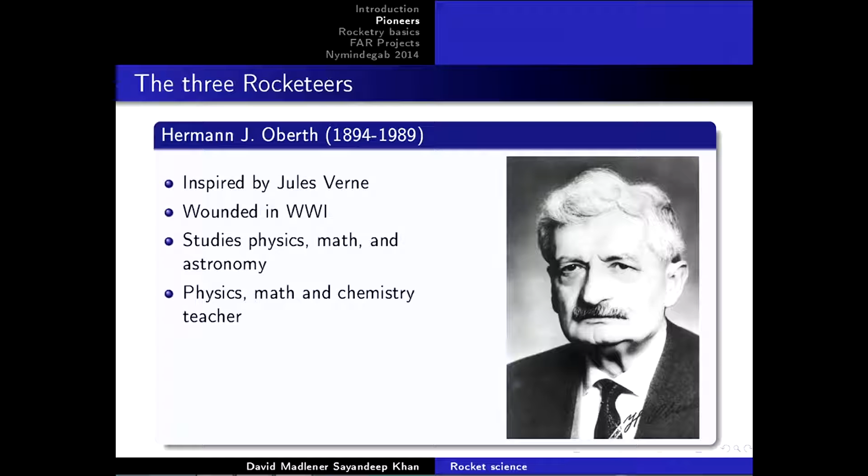And he became a physics, math, and chemistry teacher at a gymnasium, but he was very restless and started to think about rockets. His ideas, put forward in the early 1920s, were violently opposed by so-called scientists who said what he was thinking about was totally utopian and not possible, and that he was a total loon.

Anyway, he developed the first German liquid rocket engine. Just a few years later, in 1930, it had its first test, together with his pupil Wernher von Braun, who some of you may know. And, interestingly enough, he was also a philosopher and parapsychologist.

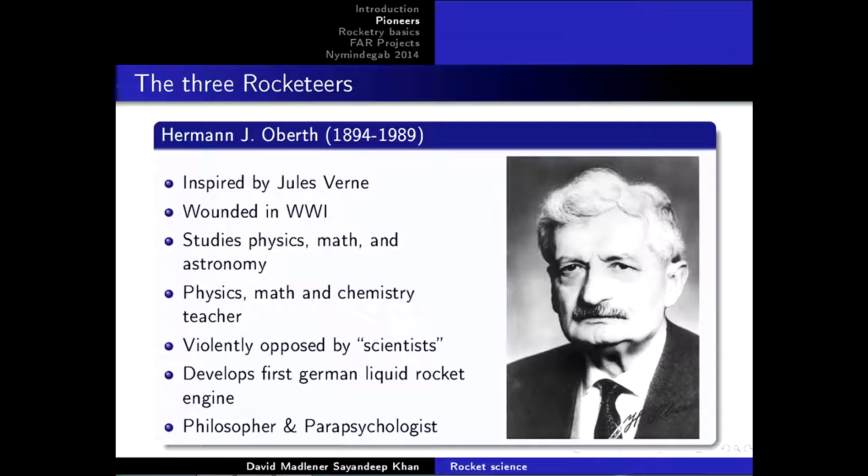So now a few important points in the lives of these three rocketeers that we know of. And one that we know very precisely, because he kept a very nice diary, is Goddard's epiphany, sitting in a cherry tree on the 19th of October, 1899.

He had just read H.G. Wells' War of the Worlds and had some chores to do outside, and instead of doing the chores, he climbed a cherry tree, where he thought about it, and he said that it was one of the quiet, colorful afternoons of sheer beauty which we have in October in New England, and as I looked toward the fields at the east...

...I imagined how wonderful it would be to make some device which had even the possibility of ascending to Mars, and how it would look on a small scale if sent up from the meadow at my feet. I was a different boy when I descended the tree from when I ascended, for existence at last seemed very purposive. So here we have a clear case where a single moment in life changes everything for this man.

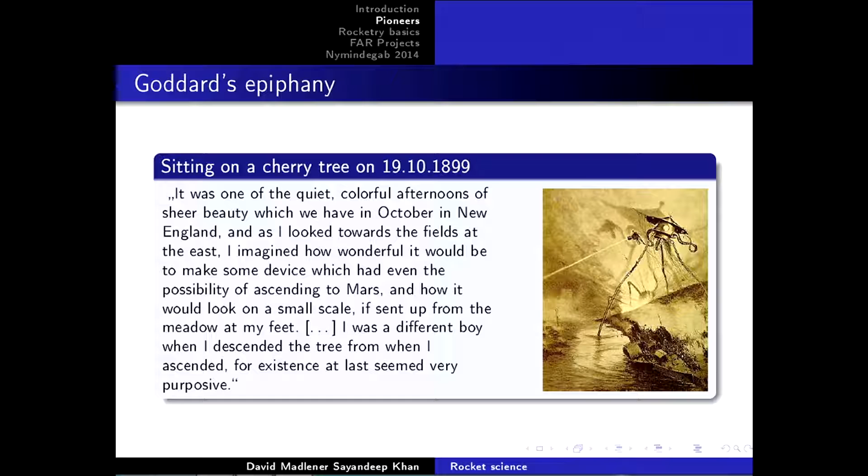Then another very important point, this time for Mr. Tsiolkovsky, was his first publication, called The Exploration of Cosmic Space by Means of Reactive Devices, also known as rockets.

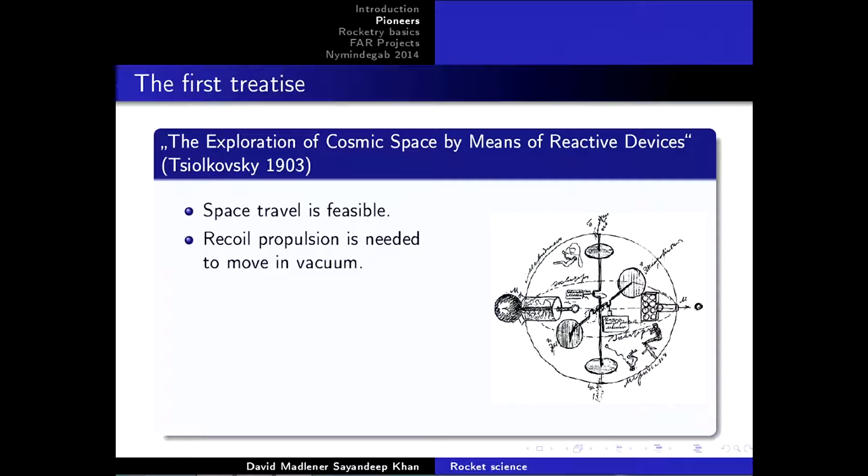So he said in this book that space travel is feasible, which was totally preposterous at that time. Recoil propulsion is needed to move in vacuum, so he had it figured out. Gunpowder is not energetic enough for propulsion, and remember that since the 12th century, every single rocket that I know of had been built with gunpowder. But he said there are liquids sufficiently energetic, so there is a loophole.

Even if gunpowder is not good enough, there are other liquids that can do it, and he named them. For example, liquid oxygen and liquid hydrogen would be an ideal propellant combination. This is very interesting because liquid hydrogen had been synthesized only a few years before in small quantities, and he was thinking about burning it in tons and tons of stuff, where 1 kilo would cost like 1 million euros. So he was way, way ahead of his time.

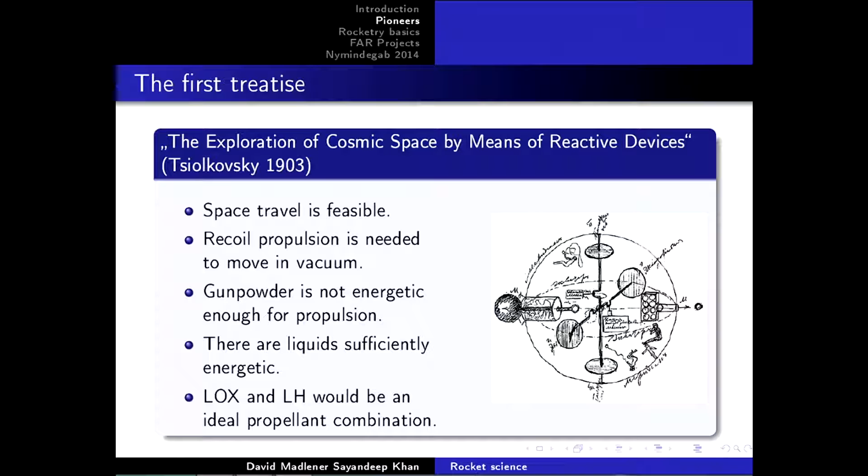As is the case with such pioneers, nobody understood what he had written in this treatise. Well, anyway, 20 years passed, and Mr. Oberth published a book. First, he tried to write a dissertation in Göttingen, where he was studying astrophysics, astronomy it was called in that day, and he called it Rocket to Planetary Spaces, die Rakete zu den Planetenräumen. His professor, Mr. Max Wolf, said it seems all quite well, but it has nothing to do with astronomy, so no, I cannot pass this dissertation. So he went on and published it as a book, and later on got a diploma thesis for this book.

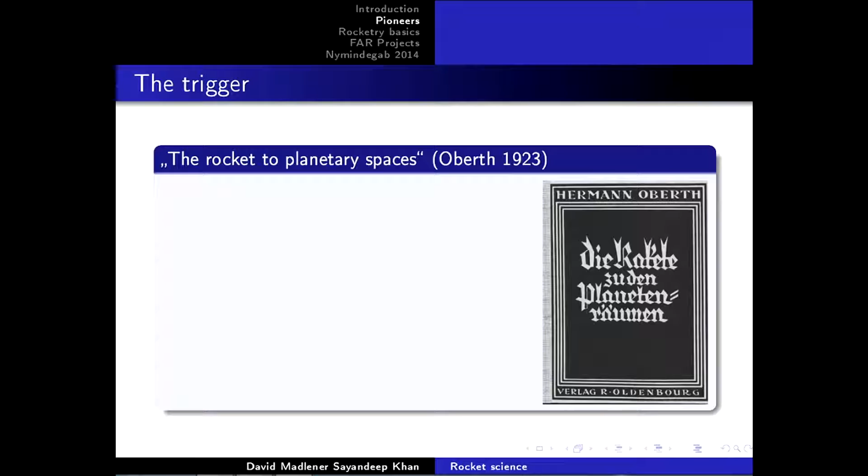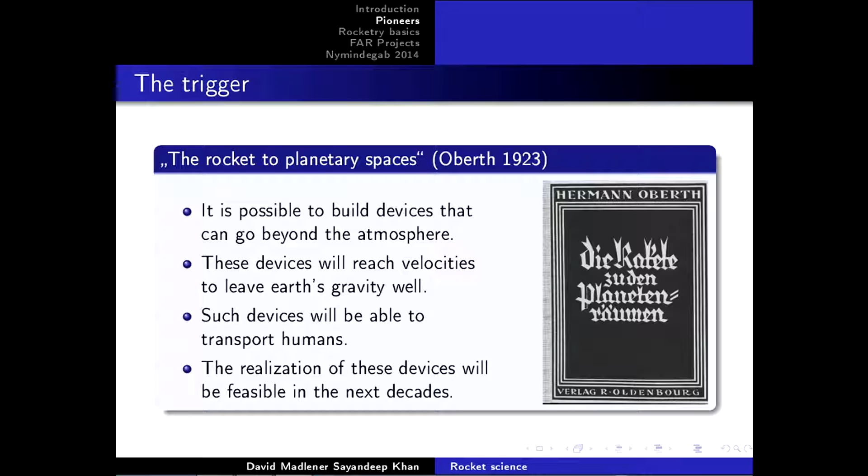This book was read throughout Germany and spread to other parts of the world, and in the end made these three rocketeers know each other. So what did he write in this book? It is possible to build a device that can go beyond the atmosphere, very similar to what Tsiolkovsky found 20 years earlier. These devices will reach velocities to leave Earth's gravity well - preposterous. And such devices will be able to transport humans - impossible. And this was the really important prophecy: the realization of these devices will be feasible in the next decades. This is quite well, knowing that we landed on the moon like 46 years later.

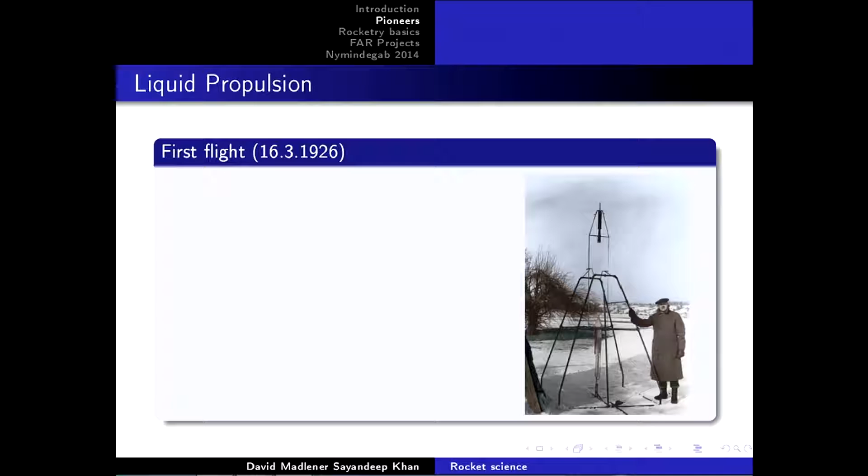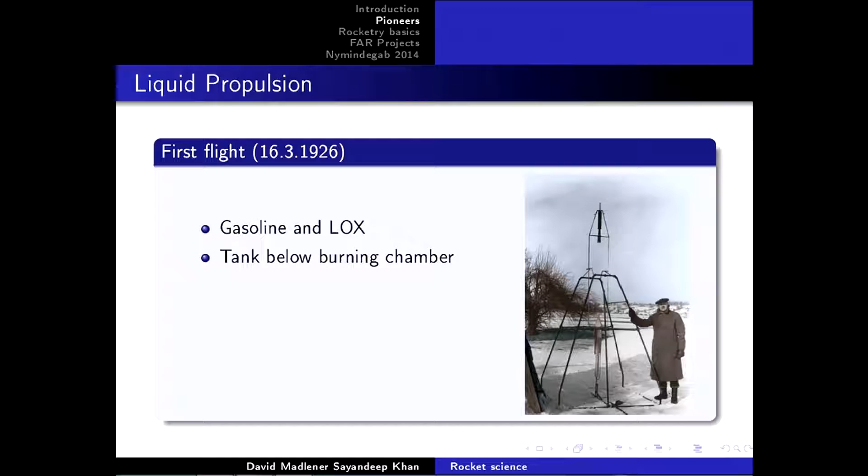Another very important point was Goddard's invention of liquid propulsion. The first flight was on 16th of March 1926. He used gasoline and liquid oxygen. The tank was below the burning chamber, totally atypical of today's design - the burning chamber is this little black thing up there. And then we have the Laval nozzle here, which was totally new, which wasn't used before.

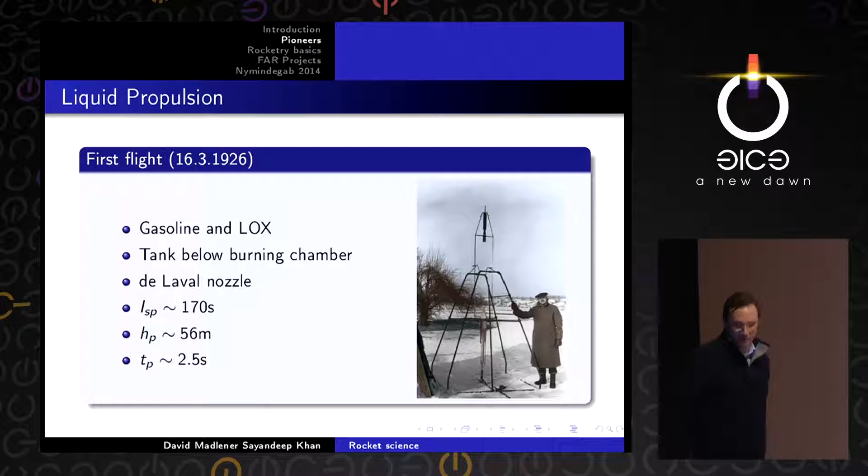It pays off to be a physics professor sometimes. It has a specific impulse of about 170, almost double that of gunpowder - not very good compared to modern engines. But anyway, he only reached 56 meters, and it lasted 2.5 seconds to reach this height. Unfortunately, there was a camera running, but before the rocket could lift off, the film was empty. So no movie - you know that moment, right? You really get something right, and then, no, sorry, but you didn't press the button. That happened to Mr. Goddard too.

Okay, let's talk about foundations. What do we need to make rocketry, to be a rocket scientist? Of course, mathematics - and mathematics is everywhere. Linear equations, algebraic equations, differential equations, calculus, integration, everything else, and some specialized things too. So mathematics is very basic. Then, of course, physics. Although we don't need very sophisticated physics, just classical mechanics, classical gravitational theory. If you get close to planets and moons, maybe you need some extension of the normal point-like theory, but this is not really complicated.

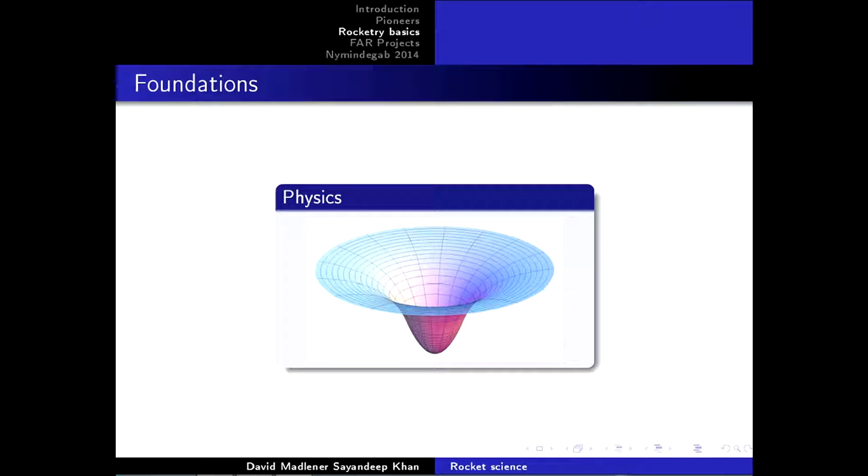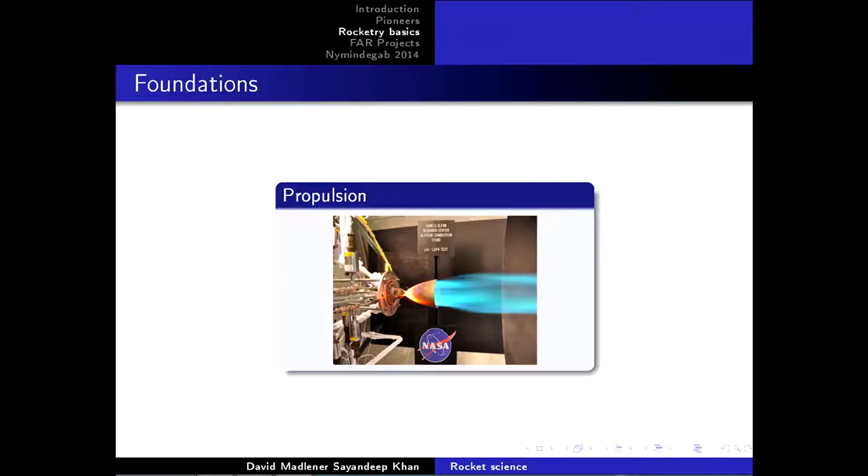Then, and this is for the pyromaniacs here, we need thermodynamics, because this is a theory of combustion. Combustion is today very important, especially for high-thrust engines. This is almost, I mean, everybody knows this: we have the burning chamber here, where the combustion takes place, and then this bell-shaped nozzle that expands the gas, transforming the inner energy into kinetic energy of the gas, thereby propelling the rocket in the other direction. Then, of course, aerodynamics, at least as long as you stay within the atmosphere - this is very important because it's the main force on the rocket.

If you have seen rocket launches, there's always this point of max Q. Max Q means the rocket is at the point where the most force is acting on it. It's very dangerous at that point, and after that, it gets down. So aerodynamics - very important, very complicated too. Orbital mechanics - once you reach space, you will have to understand very, very well where you are and where you're going. So orbital mechanics and maneuvering, otherwise you won't reach the target you intend.

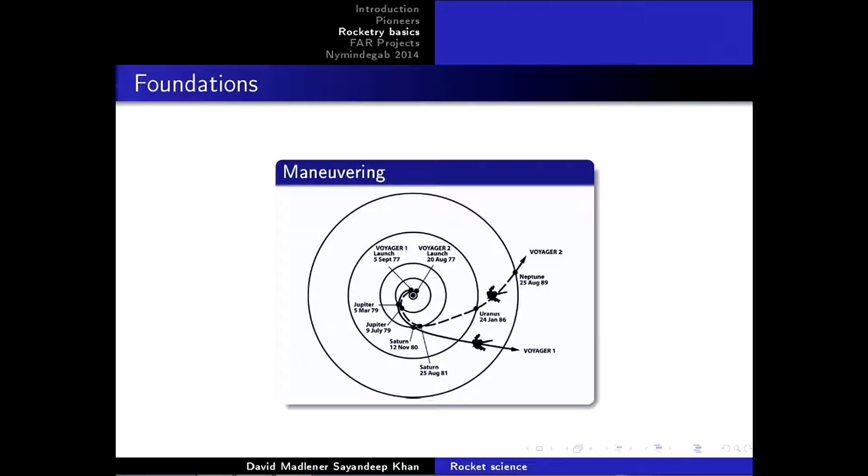This is, for example, the trajectories of Voyager 1 and 2, which was really pure luck to get so many planets in one shot. You have to launch it at the right time, otherwise it's not possible. Then you need a lot of mechanical engineering.

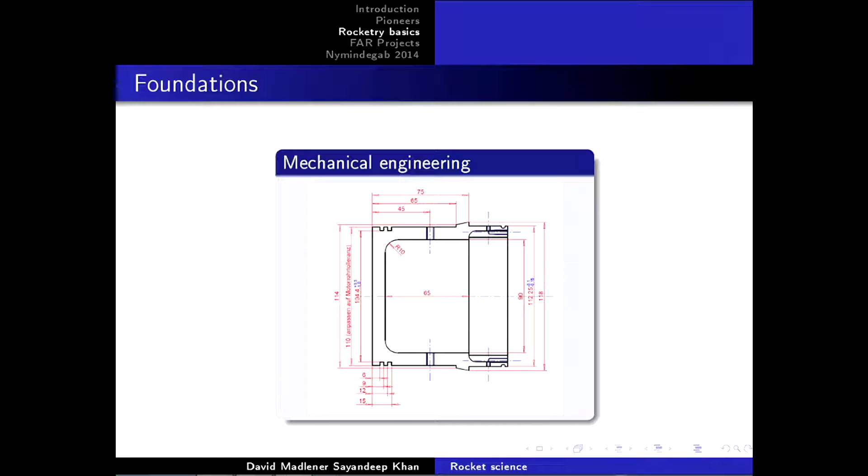This is today much easier than it was 40 years ago. We have CAD-CAM, CNC milling machines and lathes and everything. Much easier to reproduce, especially because our materials today are more reliable—if they say it's aluminum, it's aluminum, not just some crap. So we need a lot of metal working, milling, drilling, whatever.

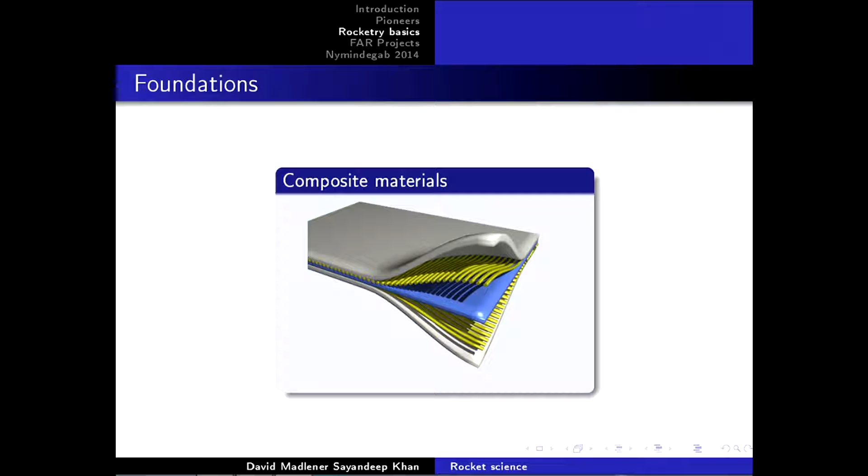And this is coming now more into focus. You will use composite materials if you need a lightweight structure that is sturdy enough. It's more complicated than cutting metal, but it's really lightweight. It pays off. Then, of course, electronics.

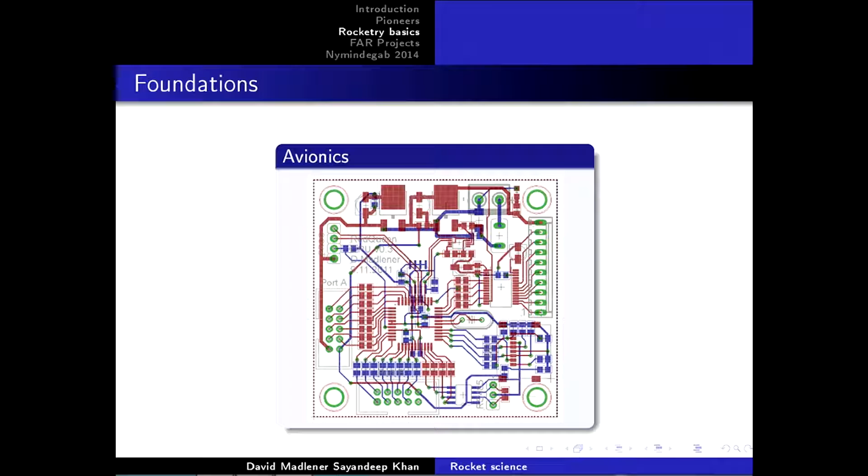Everything that will fly on a rocket will have to be very light and consume not too much energy. Otherwise the batteries will be too big. This is prohibitive. I mean, we are not in the Apollo era anymore—we don't need hundreds or thousands of watts to run a computer.

And this I don't have to tell you, we need a lot of software today. In the beginning, the first rockets were launched without digital computers. They were launched with analog computers, the so-called Mischgerät was the first of them, and there was not one single line of code. Remember that—they flew the first rockets with that until the Apollo program. The Apollo program was the first one that really used digital technology.

And very important, once the rocket is gone—and normally they are gone very, very fast—the only way to get your data is through telemetry. No other way around. Okay, now let's see how rocketry works.

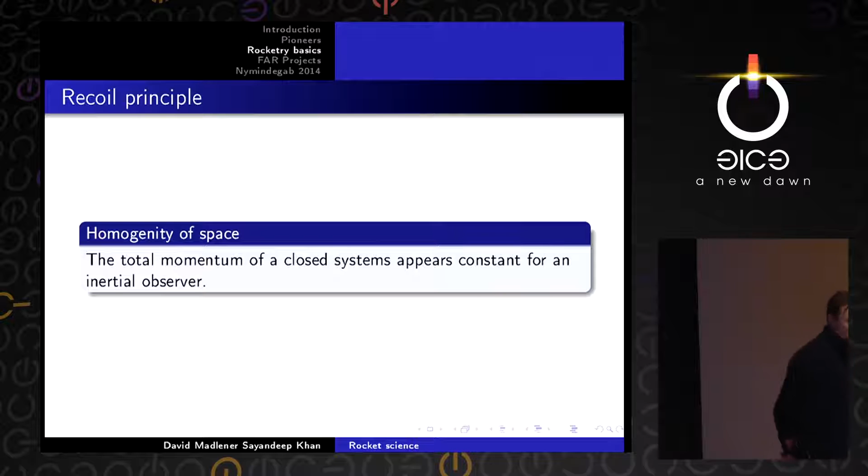The principle of every rocket is the so-called recoil principle. This states, as a direct result of the homogeneity of space via Noether's theorem, that the total momentum of a closed system appears constant for an inertial observer. Or with Newton: if there are no forces, the total momentum doesn't change.

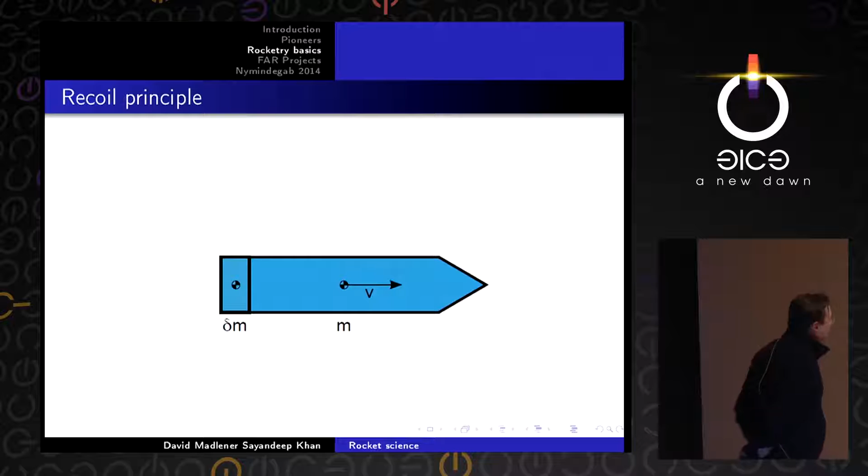So if you look at a rocket at a certain time, and the next moment it expels a little bit of mass with a relative velocity u—so this is the velocity minus u in relation to the center of gravity of the rest of the system—you go from here to there. Of course it's continuous, but just think about atoms flying away.

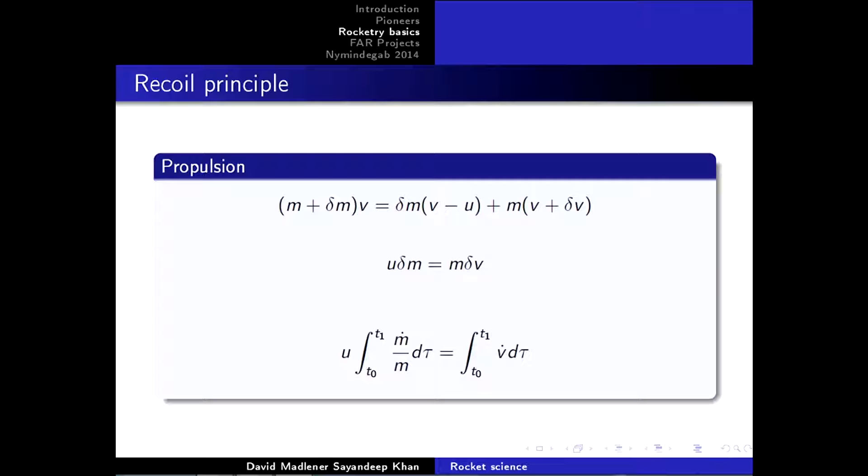So anyway, if you say that this is conserved, then the total momentum at this moment has to equal the total momentum at this moment, and this leads to a simple equation. I know equations make people run away. This one—and if you look at it very closely, you see it's much easier. It's this one. So if you divide it by the time, delta t, you get a differential equation. You can integrate it, yada yada yada, and you get to Tsiolkovsky's formula.

He found that in 1800-something, so it's not complicated at all.

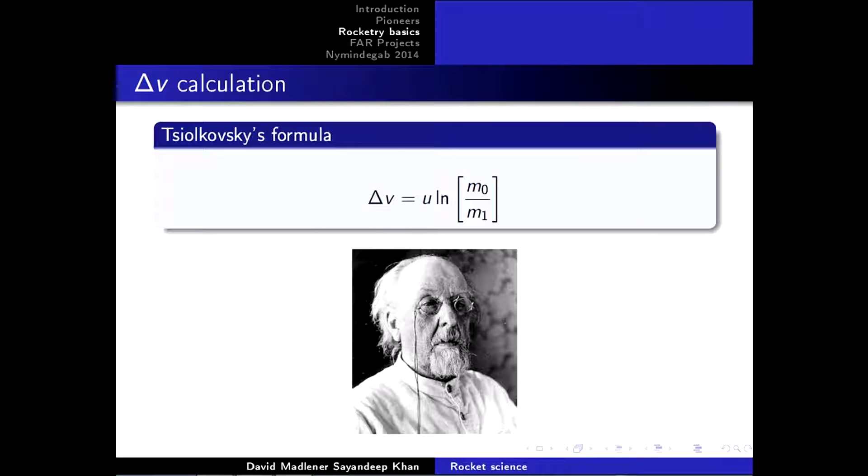This thing I call delta V, this is the only thing you really have to remember. Delta V is somehow proportional to the expulsion velocity and the logarithm of the ratio of beginning and end mass, okay? This one here is technologically given by the engine you have—this is the velocity given by gas expulsion, for example. It's in the order of 1,000 to a maximum of 5,000 meters per second. If you use electric engines you can go much higher, but with chemistry you are bound to this expulsion.

And the second term here—the lighter the rocket gets after the burn, the higher the total term gets, but because of the logarithm, the effect is very small. But anyway, you will try it.

So what do we need delta V for? You need it to get from one place in our solar system to another, because to get from one orbit to another, you need a certain delta V.

Who of you plays Kerbal Space Program? Ah, okay, very good, very good. My little son does too. My wife doesn't like it.

Anyway, so to get from the Earth to low Earth orbit, you need an exorbitant amount of up to 10 kilometers per second. That's why it's so complicated to get off the Earth. Once you are in low Earth orbit, it's relatively cheap to get to others—let's say to a geotransfer orbit is 2.5, so only a quarter.

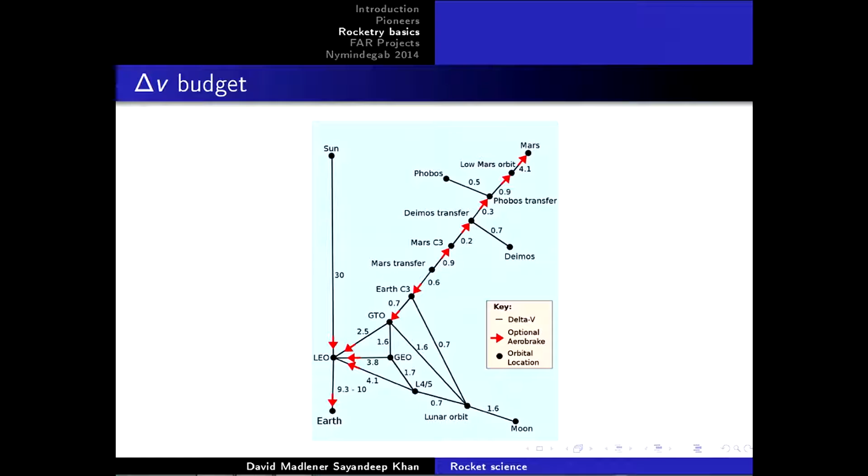And from there to Mars, it's just adding up these delta-Vs. It's not that much, okay? It's still something, but not as much as going from Earth to low Earth orbit. So getting to low Earth orbit is the real challenge. Once you're there, you have all the time in the world, and you can use a very, very little engine. This is very efficient, and you get where you want. But getting into low Earth orbit, this is the lesson you have to learn. That's complicated. Normally one stage is not enough, so you use two or several stages, and then the delta-V just adds up.

So this is the first stage, and you start with the mass m0, and at the end of the burn you have the mass m1. Then the next stage you start with m1, and the rest is m2, and this has to be as large as possible. So you spend every time a lot of mass, and that's why a Saturn V rocket looks very big at the beginning and very small at the end.

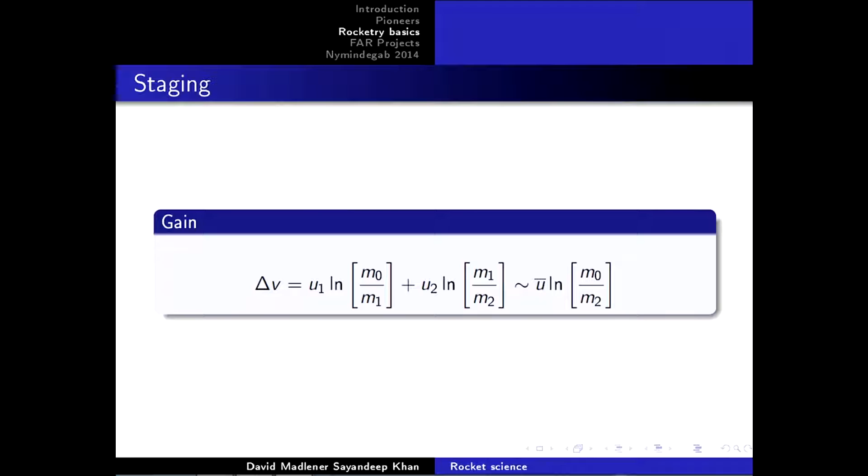Okay, so now let's talk about our projects. Why would we even do that? For our case, for the FAR, we want to make testing on suborbital flights. We cannot get into orbit now, it's impossible with the resources we have, but we can test it on suborbital flights. It means we just fly to, let's say, 10 kilometers or even only 2 kilometers, and then we can test all the stuff that is needed for a real flight, like telemetry, avionics, everything. It doesn't change, it's just a bigger rocket in the end.

Then, even if you only go to a few kilometers of height, you have almost minutes of zero or microgravity. So you can do really interesting experiments without going into space.

And what we really want to do is cross the Kármán line, because the Kármán line is at 100 kilometers, it's just a definition. There's no real line there. You can go up there and look, there's nothing. One day we just thought, okay, when are we in space? Is it 60 kilometers? No, it's 80, 120, let's take a round number. Let's take 100 kilometers, and that's the Kármán line. Normally you say the Kármán line is defined by there being no possibility that a plane can stay up there. You need a rocket.

So, what's very important too is meteorological in situ measurements, and there I want to switch to my colleague, Sean, because he is the meteorologist. And the mic? Yeah, Mike.

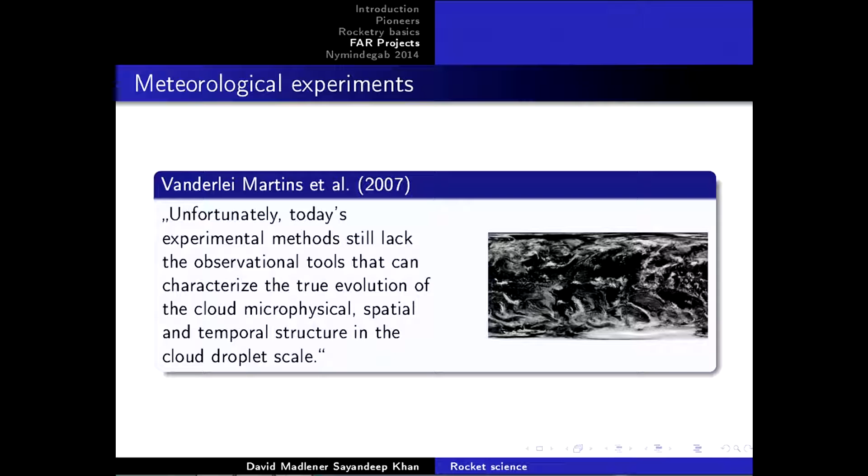Particularly, he emphasizes that the thermodynamics happening in the top part of the cloud, which is illuminated by solar radiation, is entirely different than what is happening in the bottom side or side parts of the cloud, which is not illuminated. Thereby you have entirely different thermodynamic phases, entirely different dynamics of water vapor condensing and again vaporizing. This can have really deciding effects on the climate system of this planet.

Why is this important for us? Because if any one of you have read the IPCC report, the last one and the one before that, you will see that the certainty we have in our knowledge about aerosol systems, more specifically clouds, is really, really low. If you want a quantification, the amount of error is in the order of 300%.

Investigating aerosol systems, or more specifically, investigating clouds and the indirect effects of how they influence the albedo of the planet, is really important in order to predict what the planet is going to look like in the next years or decades, and how the climate system is going to be affected by that.

The important part here is that a rocket can do really precise sonde delivery, really precise instrument delivery, and this is why this is really interesting. We can deliver a device on the top of the cloud or even on the bottom of the cloud, and then use these two devices to investigate what has not been investigated yet.

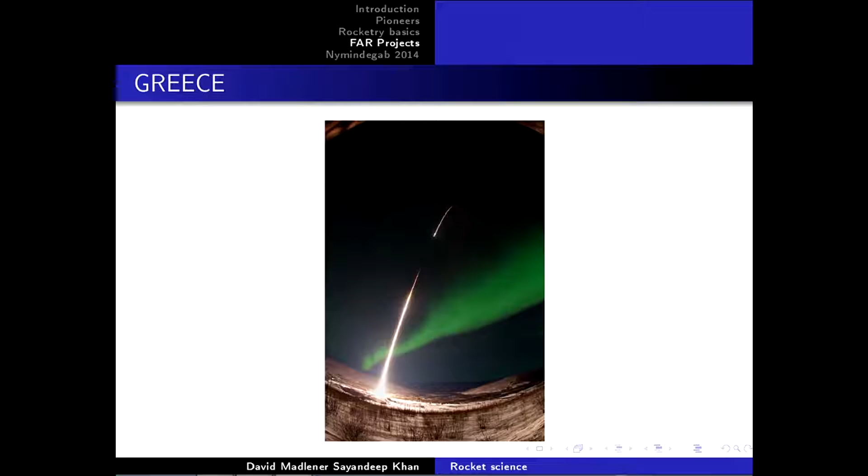In order to do that, we do not need really big rockets. First, let us take a look at this rocket. This is a sounding rocket called Javelin. This was developed to study the upper atmosphere, more specifically the ionosphere and its ionization properties.

So that the Americans could develop radio communication technologies more efficiently. But we will not need that kind of rockets. We'll need much smaller, much low-flying rockets, and Dr. Madlener will tell you more about such kind of rockets and their flight properties. Thank you.

So, as you have seen, Sean is very passionate about clouds.

Anyway, so what do we want to do and how do we do it? Our philosophy at FAR is to keep it simple, stupid, with or without the comma. So we use solid rocket engines mainly. We are also working on hybrids, but they're a little bit more complex. Solid rocket engines is what we have used the last 9 years.

And they are based on something we call candy. Actually, you can really eat the ingredients. I wouldn't recommend eating it in block, but it's sugar, it's salt that you normally put in meat so it doesn't go bad, a little bit of charcoal, which is not good for the taste, and iron oxide, which is more healthy. Anyway, we always use common materials, so aluminum, steel, multiplex wood, PVC, whatever.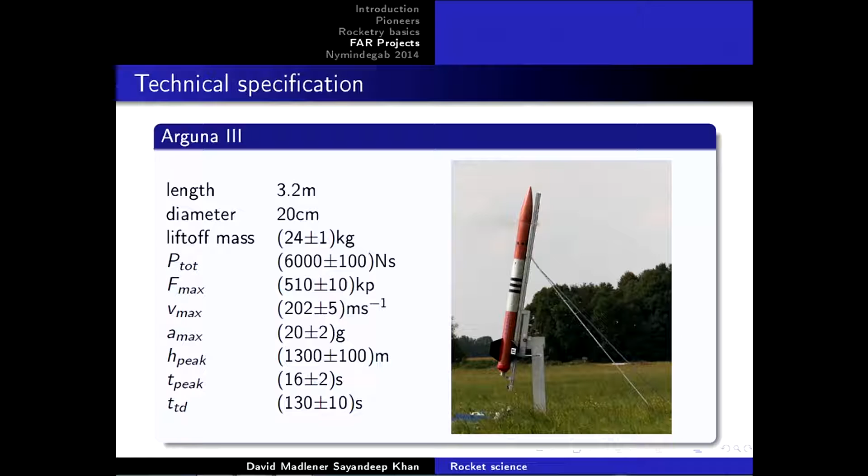Anyway, in flight it's slightly different because this here is what we call Suka, super candy, which is a mixture. It's not my invention, it's the invention of Dr. Oeckel, which has a patent on it. He's a member of our club, and the patent is just to protect it so no one can take it away, so everybody can use it. It's essentially candy with a lot of aluminum powder, like 200 micron powder, and it has like 170 seconds specific impulse, so it's a lot more power behind it.

Okay, so in 2008, 2009, we thought about building 3 rockets, but we wanted to go higher, like 10 kilometers or so. And we had contact with the Danish club called the Danish Space Challenge that operates from this little town close to Aarhus. And then we had a motor.

We will see it later in action. Here, this section here, this is the motor. This upper section was the recovery section. Here upwards is the avionics bay. We made it shorter after that.

This here is the ramp that we built for Poland, but then Poland was so dry that we couldn't go. This was in 2011. They called us like 1 week before. We were ready, we wanted to go to Poland. And they said, no, you can't come. Why not? It hasn't rained in like 4 weeks, and your rocket will ignite our wood. So sorry guys, next year maybe.

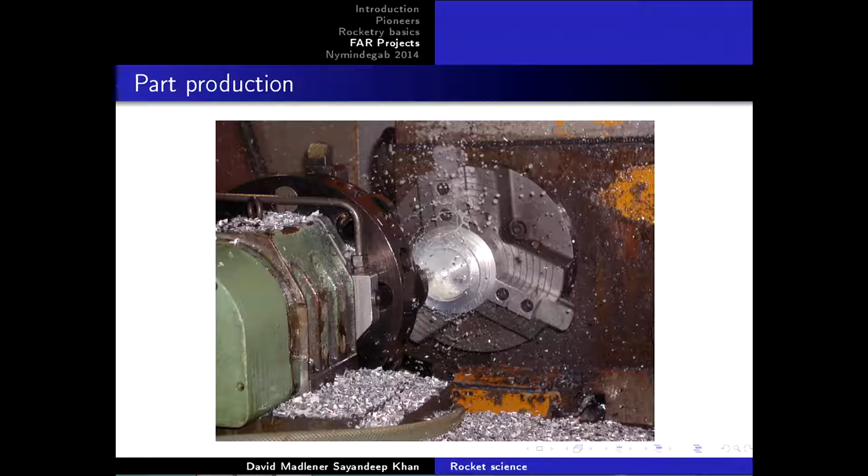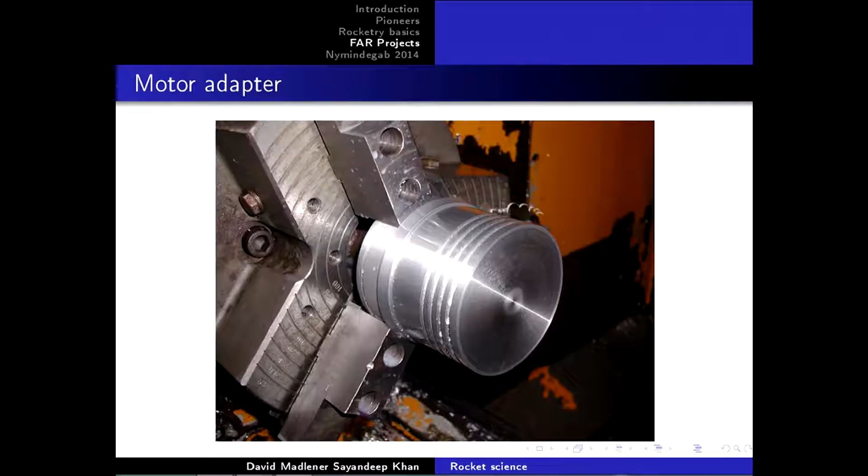And after a while, it looks like this. So this is for the motor, the upper compartment, the adapter. And these are the parts, the couplers, and for the avionics bay, the separation coupler. So these are the normal couplers for the tubes, and this here is for the motor. They were manufactured in 2010.

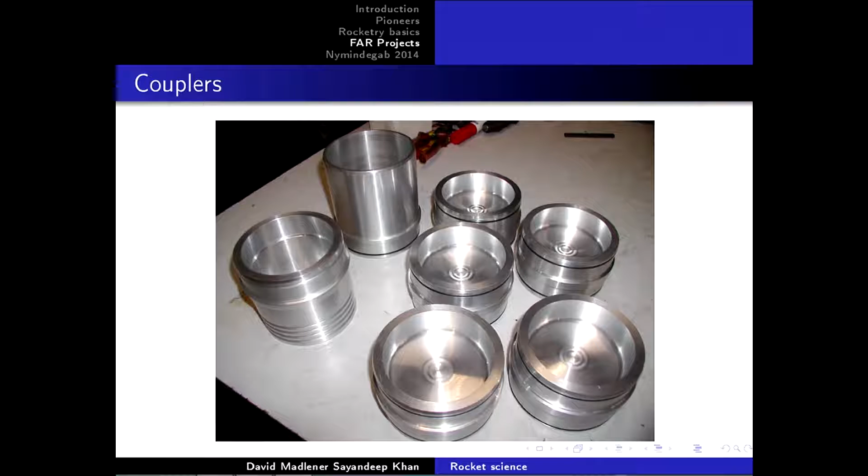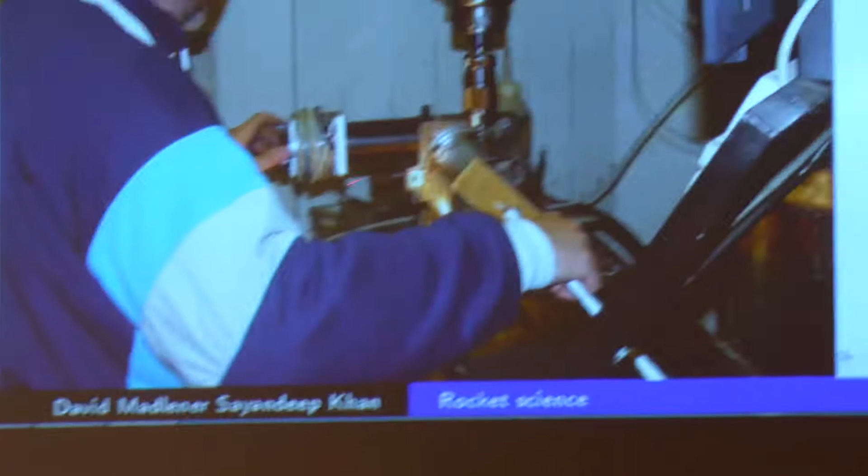And then we had to make holes in it. I mean, you take a drill, you make holes in it, right? But you have to be very precise. That's not very easy. So what you see here is a stepping motor, which you can give impulses so it turns a certain angle. Otherwise, it will be imprecise. You cannot do it by hand, it's impossible.

Again, milling. This takes a lot of time. So to mill a fin like this, it takes like 4 or 5 hours.

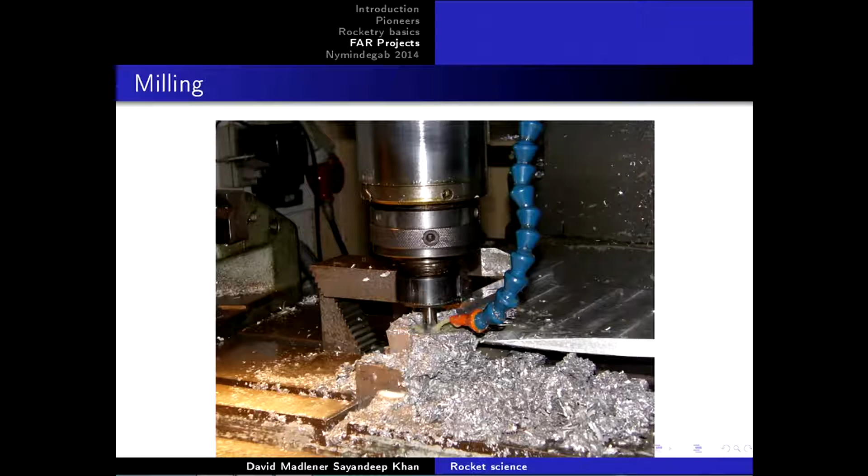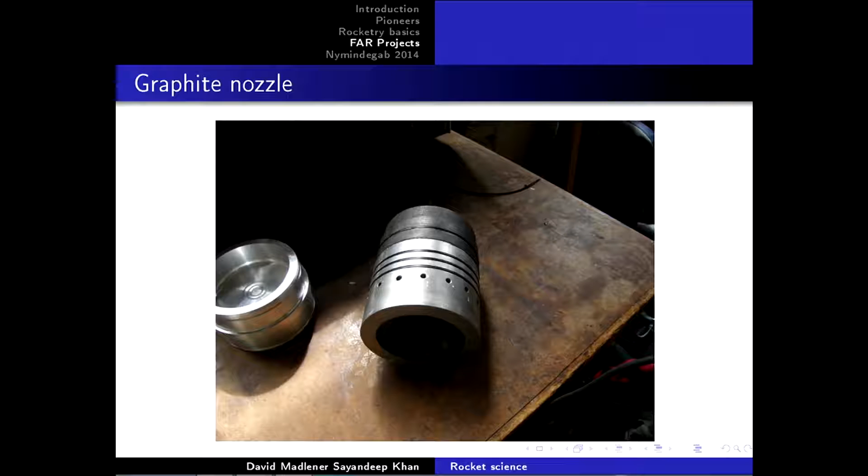This is the nozzle combined with the enclosure. So here you see the graphite part. Graphite is really very, very nice to handle. Of course, it's brittle, but it's self-smearing, so you don't have to use any lubricant during the procedures. And this is the nozzle from the other side. So you can see here the throat of the nozzle where the hot gases go through. And don't touch this after a test, it's really hot.

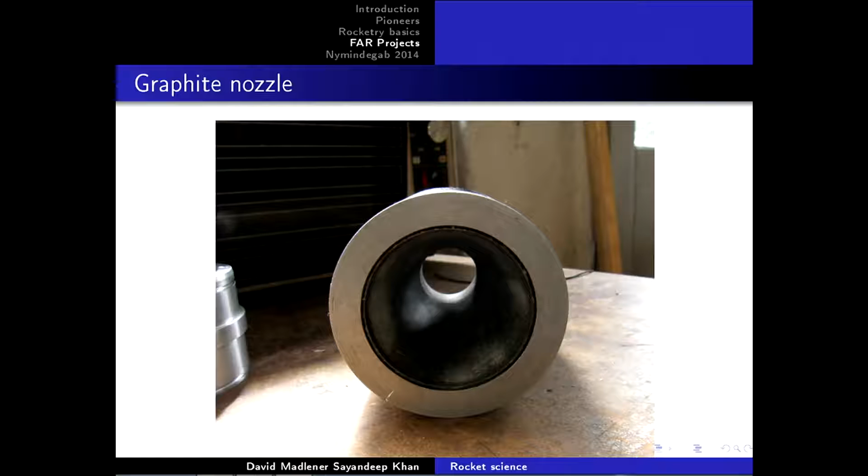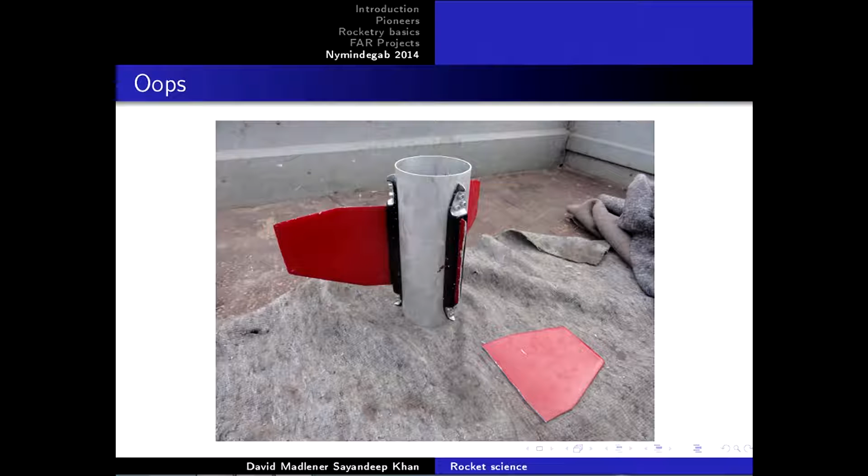So let's talk about our launch campaign in 2014. Our colleagues from DSC had the courtesy to bring us over our materials that we left there, the Arguna 4 parts, because we had to come from Cologne, Berlin, Munich and so on, and go all the way up to Denmark. So taking the whole rocket every time up and down appeared a little bit futile.

So we left the rocket there in 2013, and they told us no problem, we will bring it by. And that's what they brought us on Monday. But we were scheduled to launch on Saturday. So we were like, oops, what do we do now?

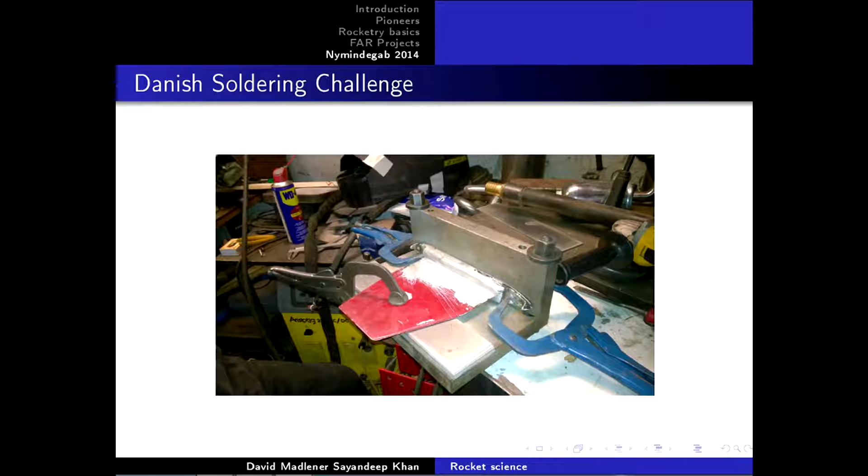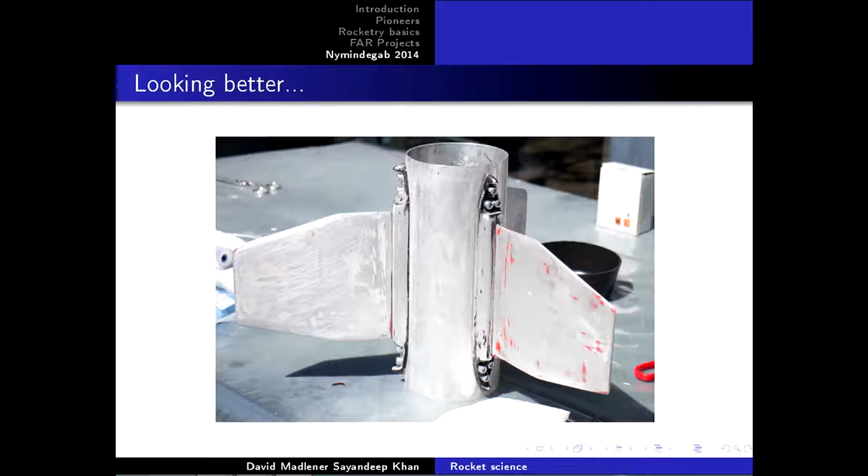But the Danish Space Challenge is up for a challenge - the Danish Soldering Challenge. Within a few hours they could repair it by soldering. This is Dural, not very easy, it's a very brittle material. They soldered it using argon gas together again. We were a little bit astonished that Dural could break so easily, so we removed all the paintings and used fiberglass to reinforce it again.

So we were there for one week before the launch. We came there on a Sunday. On Monday we were brought all the stuff from DSC, modulo the fin, and then we started to integrate. So we integrated this rocket for a whole week.

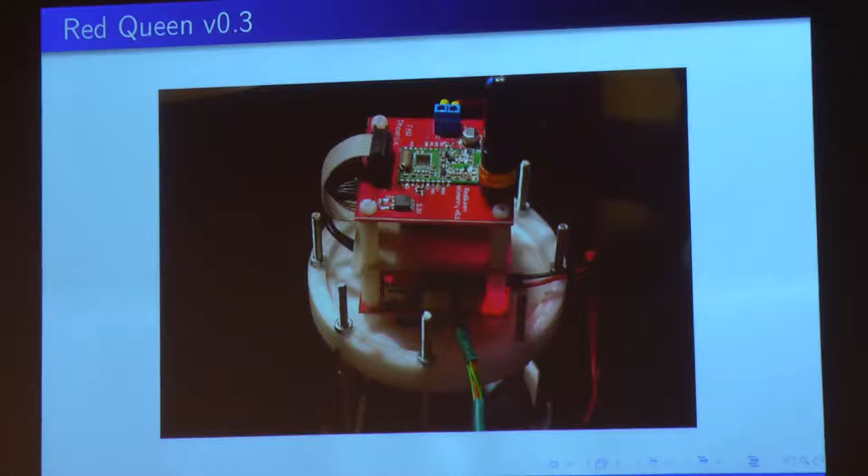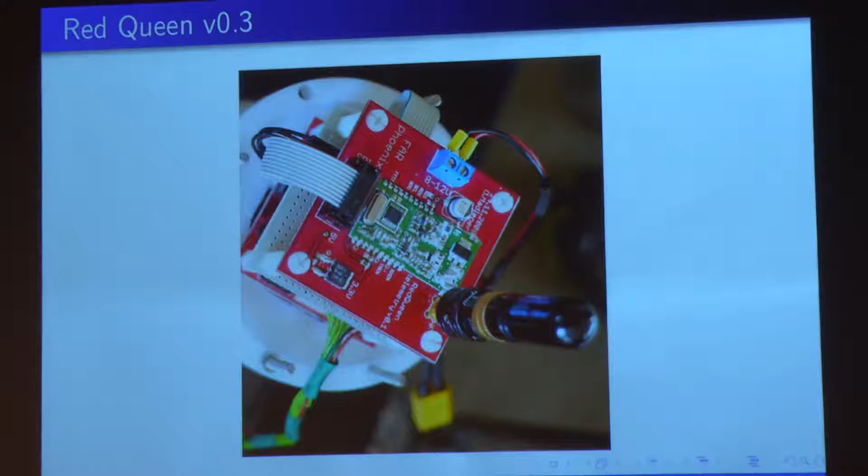So this is another view from upwards. You can see again here the power module, the RF power module. This is just a voltage regulator, and this was the antenna for the tests. This is during integration. These are just two simple LiPos - very simple, just put them on top.

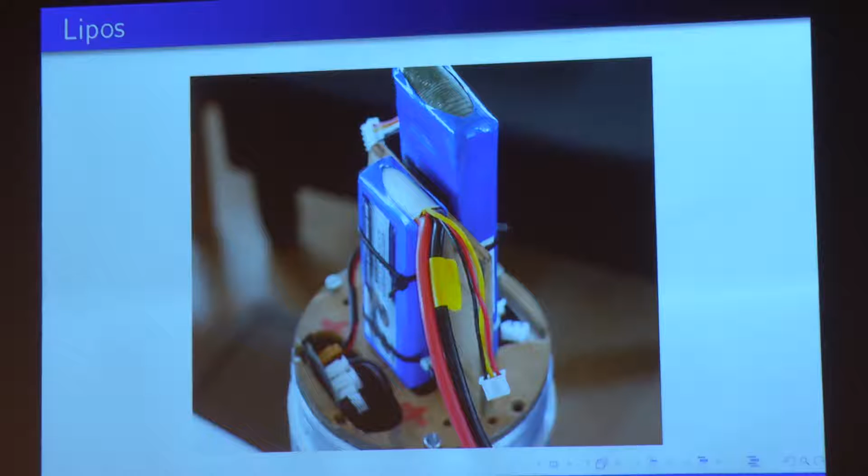And what you can see here is some cables running down to an ADC at the data processing unit, because we tried to launch this rocket like 3 times, and every time something else happened. The first time the batteries ran out on us. We had it on the ramp, everything was ready, and then no telemetry came. We said, what happened? It was just that the battery died on us.

It was the first time, in Tranum, in the north part of Denmark. The second time, the Danes switched the launch place to Nymindegab, in the southern part of Denmark, where there is very fine white sand. There's a location very close to Nymindegab called Hvide Sande, which means white sands. So we tried to launch on white sands, but then they got with their truck onto this white sand, and it just sank - boop - into the sand, and they had to call a crane to get it out again. So no launch that day.

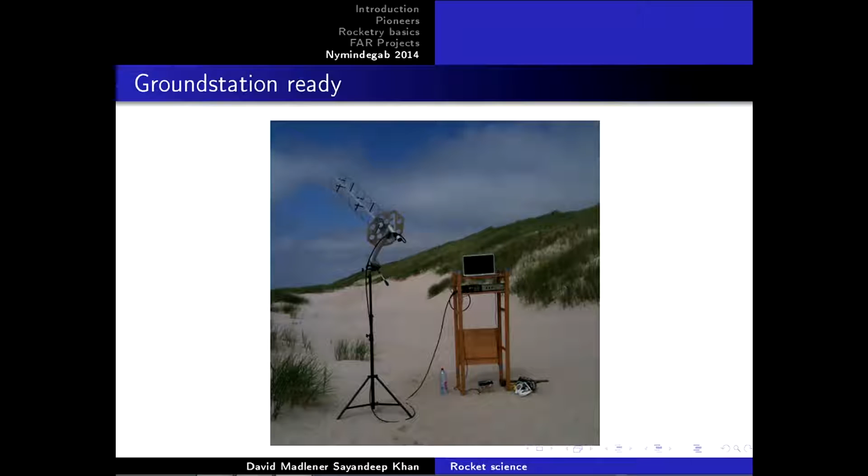This is the antenna, a circularly polarized antenna, very nice, for 70 centimeters. We had 2 of them. This is one ground station - we receive telemetry over this antenna, it goes directly to the laptop, and you can see the stream in real time.

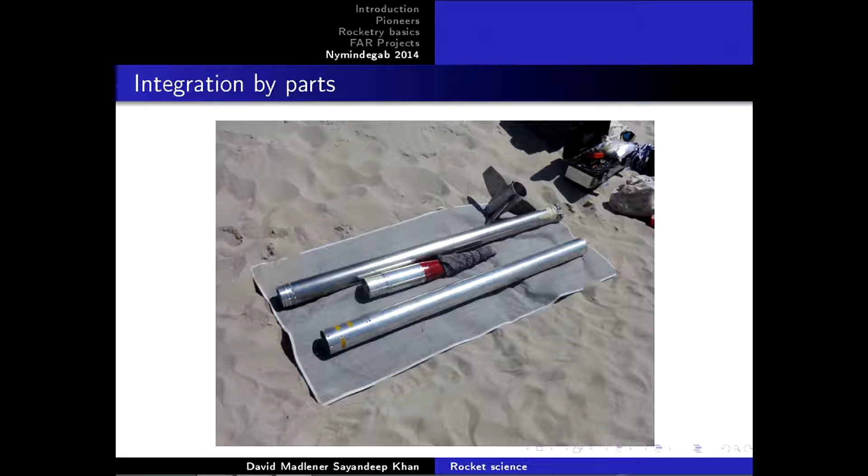So these are the 3 parts: again the tip here, the avionics part with telemetry, and the recovery part, which is a CO2 cartridge that is ejected at the highest point, or should have been ejected at the highest point. This is the motor - I'll come to this.

This is the motor, with the 18 kilograms of Suka giving about 1.2 tons of thrust for about 3 seconds, which gives the rocket an acceleration at burnout of about 30 G. So it's fast - you count to 3 and it's gone.

I mean, literally gone. And this is the recovery section with the parachutes, and of course, as we are over the sea, a buoy - or better said, there were 2 buoys, but only one worked. Anyway, this is the launch. It's very impressive, and I want to show you on video - just have to start it up.

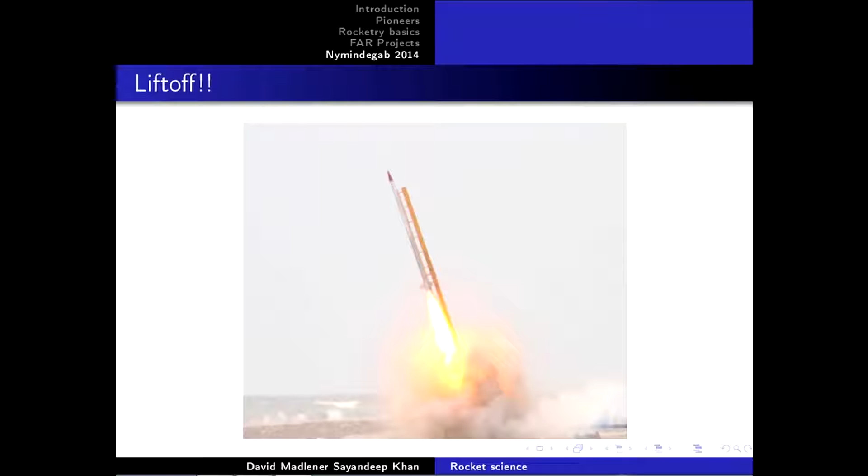First, I'll show you the motor. This was a test performed in 2009, where we were just thinking about the Aguna 4. There was a test that didn't work out in 2008.

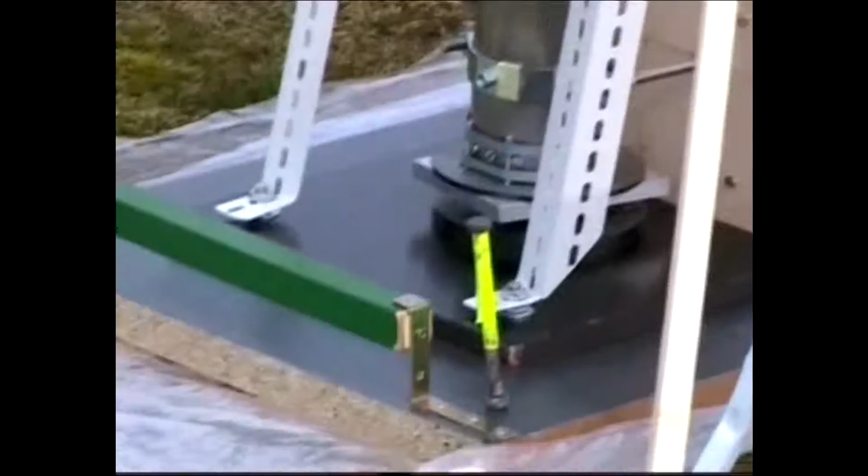So this is a setup, very simple. If you look at it, you can find everything in your normal hardware store, except maybe the graphite nozzle. That's very difficult to get, but anyway.

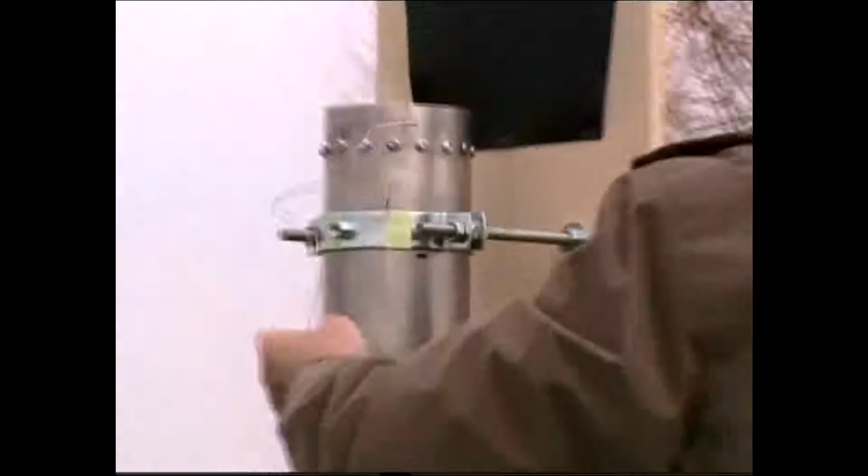So this is Dr. Oeckel. If you look closely, he's missing one finger on his right hand, and he says he will never again touch chlorates, never. He works for this, he lives for this. He's a chemist by profession, and he worked as director of the Bayern Chemie, so he knows what he does. But even professionals can sometimes get mutilated, and he's also slightly deaf on one ear. That's why I always say, please stop doing solid rockets. But nobody can stop this man.

So we are in a field, I think it's somewhere in Bavaria, I don't remember exactly. Can we get sound on this? I think so. Put it a little louder. Moment, I try. Where is this? Oh, there, no? Here, yeah.

Fünf, 4, 3, 2, 1, 0. Pop.

This Suka is very slow, and we have a reason why it's so slow. We tested it at BAM. It has this BAM certification, which is, in German we say, without BAM, no boom, okay? This is very important. You are not allowed to use such pyrotechnics without proper registration and everything. So Dr. Oeckel has the certificate to manufacture that kind of stuff.

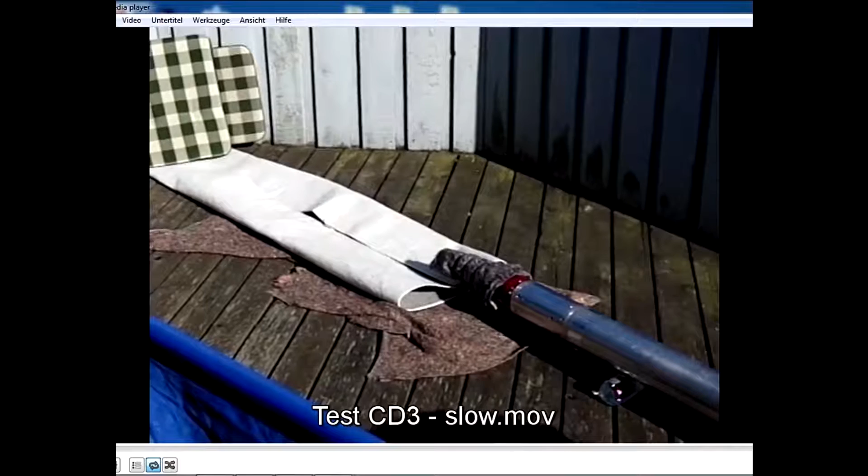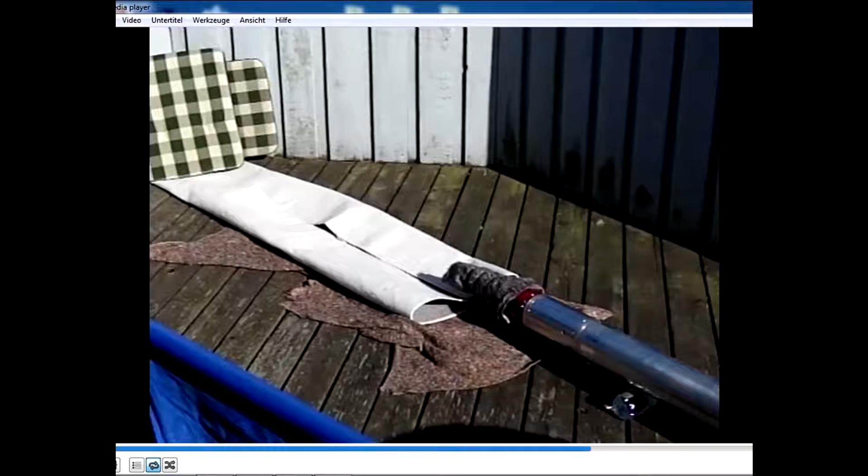And this can be shown also in slow motion, so you can really appreciate what's happening there. Please look for the CO2 snow. I think I have to, this is really slow, takes a lot of time. I think this is a Casio EX-F1, I don't know, I don't remember. Just to the end, now, okay? So this is what happens in slow motion.

We made a lot of tests, and this was one very, very spectacular during daytime. We did some tests during nighttime too. So this is the launch itself, this is slow motion, I tell you, this is slow motion. This is like half the speed of the real rocket.

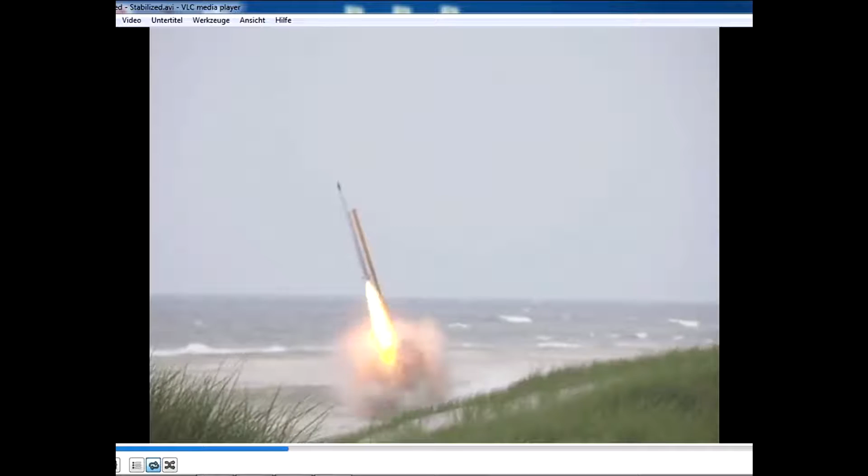Bye-bye. In reality, it's like, where did it go? Well, it was very funny this day because at the beginning we had blue skies, really nice weather, and then the clouds came. And then our Danish friends from Danish Space Shuttle, they had also a rocket, a little smaller one, not too small, but not that fast. And it went into the cloud, and in the cloud something happened, like boom. And then on the same trajectory, the rocket fell down.

It was as if the cloud had munched it up or something. Then this one got up and we got nice telemetry, but it went down and we never found it that day. So we were a little sad, but we had the telemetry. We were glad and sad at the same moment - glad because finally we could launch the rocket, and sad because we couldn't take it home.

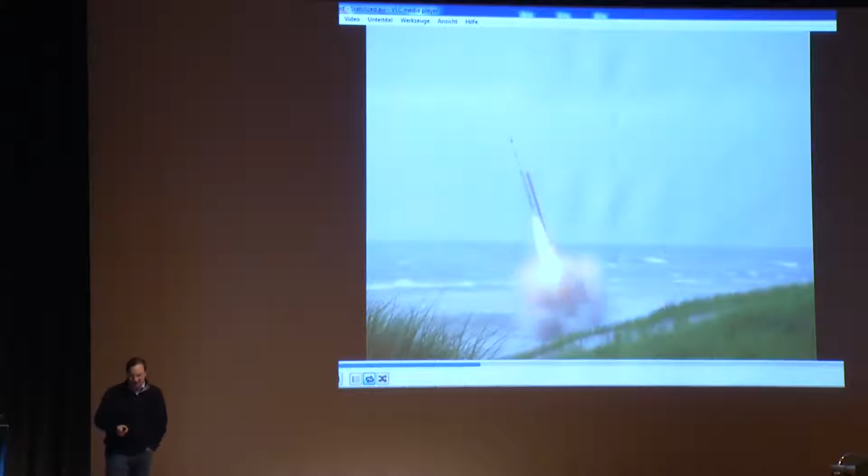But two days later, when we were there on Sunday thinking about nothing, a mail came in and said, look what the cat dragged in - and there our rocket was again. It had survived with one buoy. It was in Danish newspapers and everything, rocket found at whatever site, and we don't know where it comes from or who.

But the chairman of DSC, he's a journalist, no problem. His press release was flawless.

Anyway, so that's what we have been doing. We will try to refit the Arguna 4, which is now in Denmark, using a DART to go even higher. This one reached 6.5 kilometers. I could show you all the telemetry, but it's not really very interesting - it takes a lot of time, but if somebody's interested, please ask. This will be our next rocket.

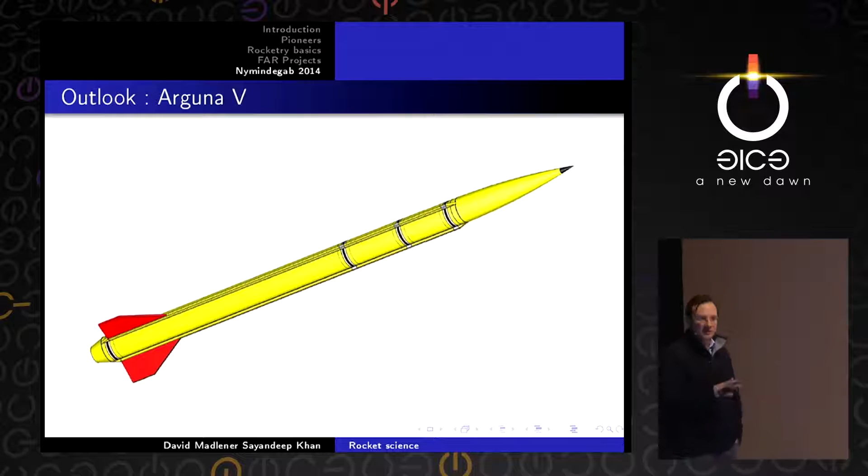There are no lengths, but this is like the same length as the Arguna 4, about 4.5 meters, but like 30 centimeters diameter or so, 20 to 30 centimeters. It's called the Arguna 5, and we already have a mock-up. Not a flying version in the sense that it will go 50 kilometers high, but a mock-up that will go up to about 2 kilometers, just to test everything, aerodynamics, and so on. Okay, so that's for today. Please, if you have questions.